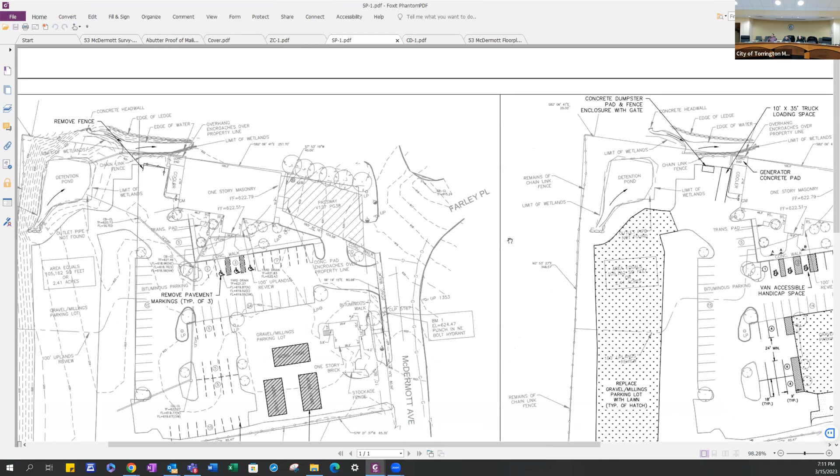Okay. On the left is our removal plan, showing the removal of some of the parking spaces, et cetera. These changes for the parking, once again, are basically striping on the pavement, but we're looking to remove some parking along the bottom side of the lot that really doesn't conform presently, and restripe the handicap parking spaces immediately in front of the building to bring those into compliance.

We also would be marking out a loading space to the rear of the building, adding a dumpster pad and enclosure. And then we are looking to add some additional landscaping on the site, once again, to bring it into compliance.

The intent here is, as much as possible, to bring the site into compliance with the regulations as they exist now. As part of the landscaping work, the larger gravel area in the rear, and also a smaller gravel area in back of the existing brick building. There's a second smaller building on site to the south of the restaurant. And in back of that, and also in the back of the majority of the property, there's gravel millings parking areas. The staff has requested that we basically remove those areas and turn them into loam and seed and turn them into green areas. So we've shown that on the site also.

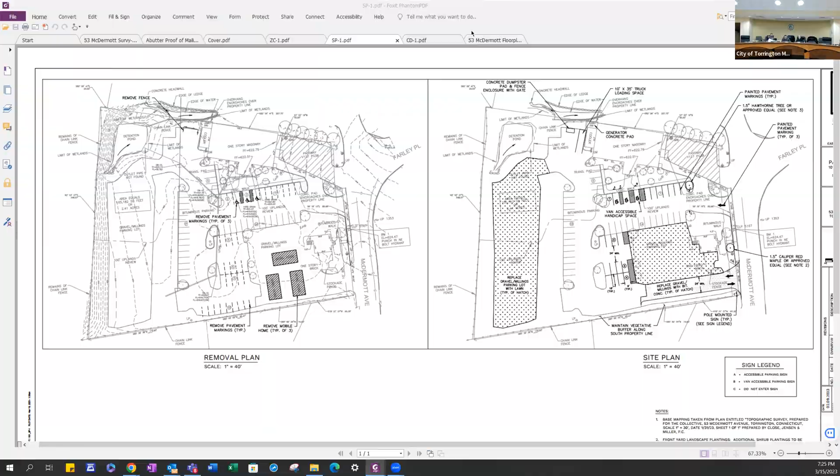All right, the time is 7:25. Moving on to agenda item number 4C, special exception 23-01 and site plan 1442, applicant A. Secundino and Sons, Inc., location 95 Grove Street and 104 Grove Street. Proposal, change of use to educational facility and office use. It's a former church use. Do you have legal notice, please? I do.

City of Torrington Planning and Zoning Commission legal notice. The Planning and Zoning Commission has scheduled public hearings on the following applications at 7 PM on Wednesday, March 15th, 2023, in the City Hall Auditorium, Room 218, 140 Main Street, Torrington, Connecticut. B, special exception 23-01 and site plan 1442, applicant A. Secundino and Son, Inc., location 95 Grove Street and 104 Grove Street. Proposal, change of use to educational facility and office use, former church use. Time of hearing immediately following the previous public hearing.

Thank you, Commissioner Greco. Serving on the commission this evening is Greg Cursino, Donovan Riley, Starley Arias, Donna Greco, myself, Greg Mealy, and also in attendance is our city planner, Jeremy Lightford. Is the applicant in attendance, please? Yes, sir. Were the green cards submitted and a sign posted for the time? Yes, the signs were posted on the site as well as green cards submitted. All right, very good. Thank you. Please continue. Sure. Good evening.

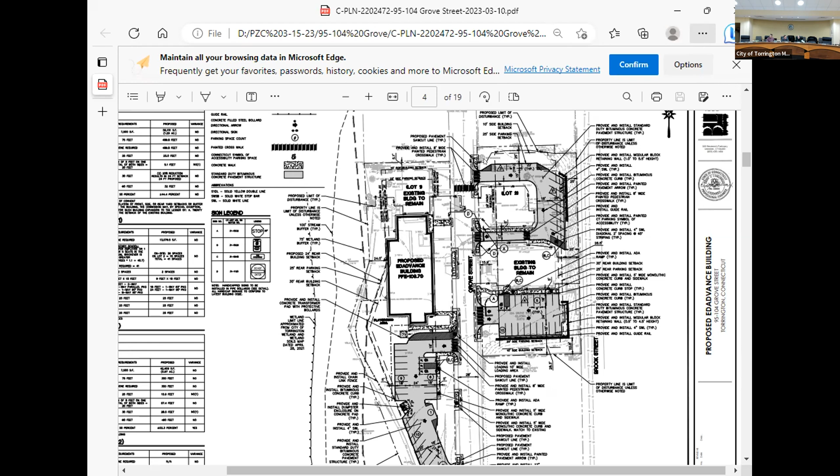So as John mentioned, there are 3 buildings on site. We are only adding an addition to the existing convent on the south side of the street, to the west side. It's a new Head Start program with 11 classrooms, 2 specialized support spaces, and then general administrative and other support spaces. The existing convent is going to remain intact, and the new addition, as I said, is to the west. There are 8 classrooms on the first floor. Because of ADA access, we've got to keep the building at grade, and the existing floor for the existing convent is about 3 feet above grade.

So we have an internal ramp that's going to connect the new classroom spaces to the support spaces, generally offices and meeting spaces in the existing convent. So the existing fenestration and all those spaces will remain intact. We're trying to keep the existing convent, which is a beautiful building, untouched as much as possible. There's going to be an elevator core. The main circulation is located between the convent and classroom buildings to the west.

Because these are all Head Start, so they're all 3 and 4-year-olds in the building, by code we're required to provide direct access out of each one of those spaces to grade. We have 2 egress stairs at each end of the new addition. We're maintaining the existing staircases in the existing convent intact. Upstairs, we've got 3 more classrooms. We had to provide interior stairs that go from the classroom directly outside per code. Because they're little kids, they have to have direct access to grade, so we provide that kind of access.

Again, the main lobby is between the existing convent and the stairs. We've got an elevator core which provides support for both spaces. Again, upstairs, it's mostly just support spaces, administrative offices, in the existing convent. We'll take advantage of the existing fenestration and leave the building intact and not make any serious modifications there. Moving on to the elevations.

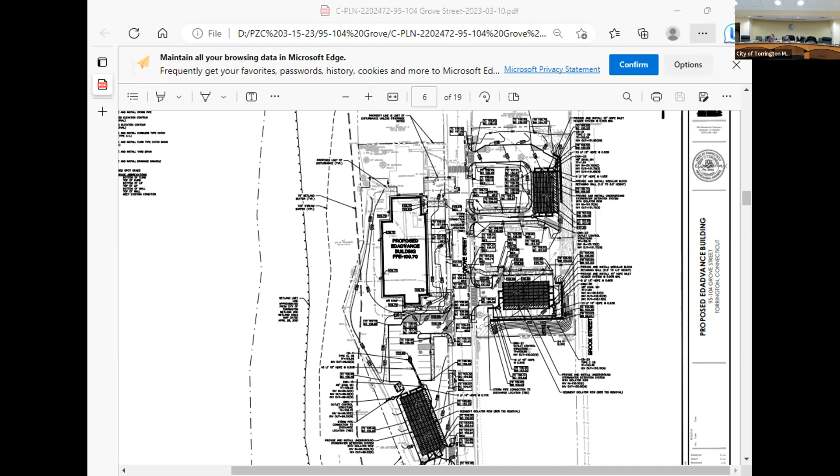Four, the applicant shall be required to stripe and mark the handicap space on the site. Five, no more than 4 vehicles shall be displayed for sale at any time as presented on the submitted plan. Six, in accordance with section 8.4.3 and 8.4.6 of the zoning regulations, the following shall be submitted to the city planner. A, 2 paper copies of the full approved plans, including the engineer's stamp and chairman's signature box.

B, 1 Mylar copy of the full approved plan set for filing with the city clerk in accordance with section 8.4.3.p of the zoning regulations. Each Mylar sheet shall bear a chairman's signature box, a copy of the approval letter from the commission, an engineer's seal and live ink stamp. C, Mylar sheets shall be filed by the applicant with the city clerk after the signature of the chairman and prior to occupying the site for business use.

Thank you. Do I have a second? Second. Thank you, Commissioner Parasino. All those in favor? Aye. Aye. Opposed? So moved. Good luck, sir. Thank you. Have a good night. All right.

All right, moving on to agenda item number 6B, site plan 1445, applicant Borghese Building, location 2015 East Main Street. Proposal renovate and 2 new additions. I'm sorry. Back it up. I skipped one. Sit back down, Mr. Borghese. Sorry. I guess I just want to get out of here.

Agenda item number 6A, new business. Special exception 23-02, applicant Wendy Roberts for WM Water 63 LLC, location 63 Water Street, proposal 2 residential units on first floor in DD zone, 6.8.17A.B. We need to set a public hearing date. The suggested date is April 19th, '23.

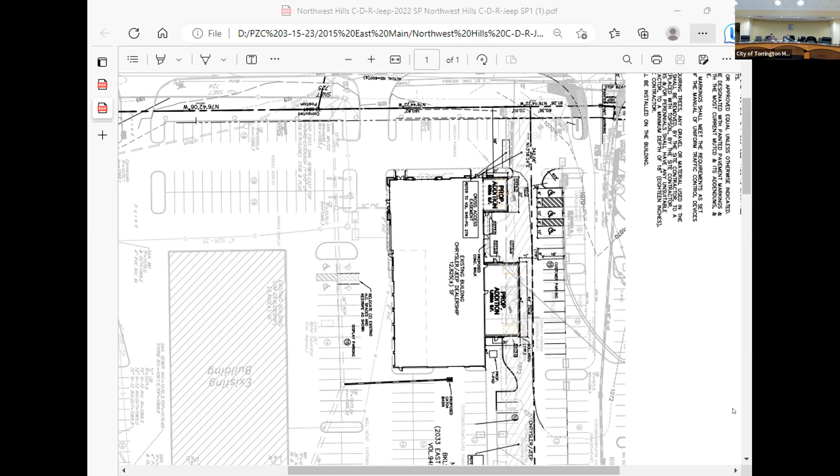Both additions, so to speak, are pretty much relatively wide open. There's no offices or anything inside that. The actual work is inside their existing building. So when you face Northwest Hills, this is the building to the left, the Jeep. If you're facing Northwest Hills, it's a center building, the Chevrolet. Okay. Jeep, and then Honda's to the left. Okay, thank you. So if you're looking at Jeep, it's going to go towards the Honda side, the two additions. Right. I was gonna say the house is still on the other side. No.

Any commissioners have any questions? Jeremy, I believe there's staff comments pending on this. Yes, there's still staff comments pending. I think somebody has a question on that. Oh, sorry. Yeah. Starley, you got something? Yeah, before we move on, I have to recuse myself from this site plan. Okay. Note that for the record. Thank you, Starley. Appreciate that. All right, go ahead, Joe.

Yeah, we're just waiting to clean up our comments from other departments, and we should run this through ARC just to let them get a look at it. Yeah, when I applied, I said I would apply for ARC as well, so. Yeah, sorry, I didn't talk to you about this. There's a million things going on when you submitted. No worries. All right, so once that other information is back together, we'll see you again. Okay. Sound good? Sure.

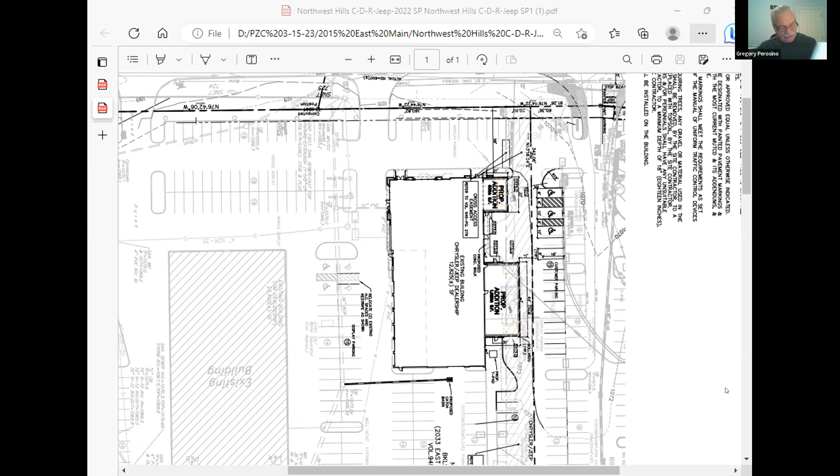So in the affordable housing plan, some of the pieces that we have to look into implementing had to do with fair housing as well. I have to compile that. We did that adoption in the POCD, that piece of it, but that's all we've done so far. Right. It's just that there's the ACLU, there's all kinds of legal groups that are really pushing hard. And we don't want that either. So I would love to see Torrington be ahead of that curve.

All right, so I'm thinking when we start doing double meetings in May and June, it might be a good thing to put on just for discussion, because maybe we'll have a little less busy meetings. It doesn't look like April's going to be less busy. All right, sounds good.